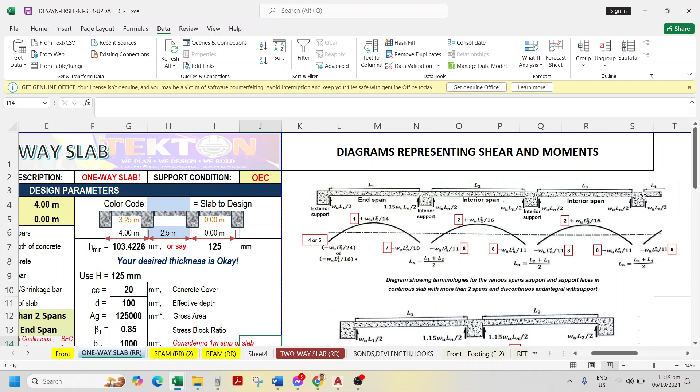Balikan natin yung design of one-way slab, fixing the issue of the average length ng span. Kung mapapansin natin dito, sa dalawang type of system ng slabs natin dito, meron tayong part ng interior span, may end span. Kung more than 2 spans yung ating system, may end span tsaka interior span. Tapos meron naman tayong case like two spans lang. So paano magiging independent yung ating design of one-way slab calculator?

So inayos ko siya na magiging fit para sa kanilang lahat. Itong parameters area natin is wala namang nabago, nadagdagan lang ng ganitong portion. Bakit? Kasi di ba kapag

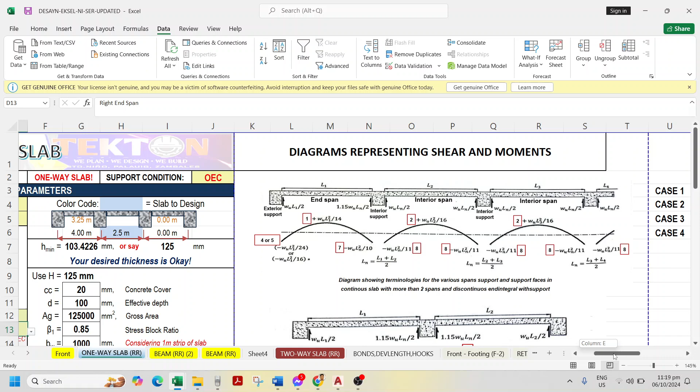nagde-design ka, for example, ng two spans, so you have L1 and L2. Ang deflection ng slab sa one-way slab, for example, you are designing this left span, is this deflection. Therefore, yung number 1 is WL1 squared over 14. Take note of this, L1 squared, meaning yung length mismo ng span 1 yung ginagamit. Hindi natin siya ina-average because it centralize the moment, nasa L1 siya, nasa center lang siya.

Unlike we have here negative moments in left and right support. Makikita mo dito na kapag sa left side o left support ng span 1, hindi din ina-average yung length, L1 ang ginagamit. So dito sa right support, mapapansin nyo na nag-LN or average of these two.

Okay, yung adjacent side niya. Mahalaga yung part na meron siyang adjacent span. Na-minimize nito yung resistance na isang slab kapag may katabi siya. Of course, dapat ma-consider natin yun. Kaya mapapansin nyo, lumiliit yung LN natin because na-average silang dalawa, or regardless of the length ng sarili niya, depende rin kung mahaba yung span ng katabi niya.

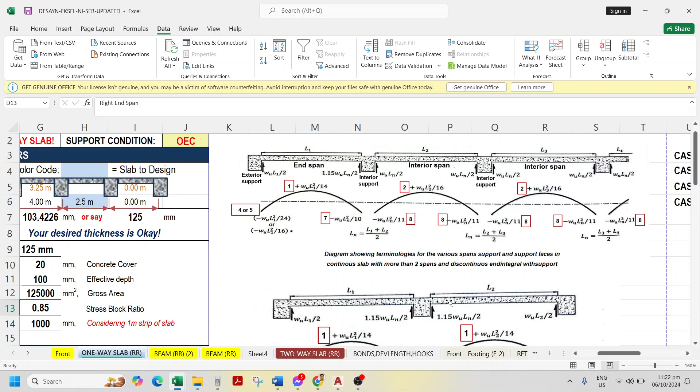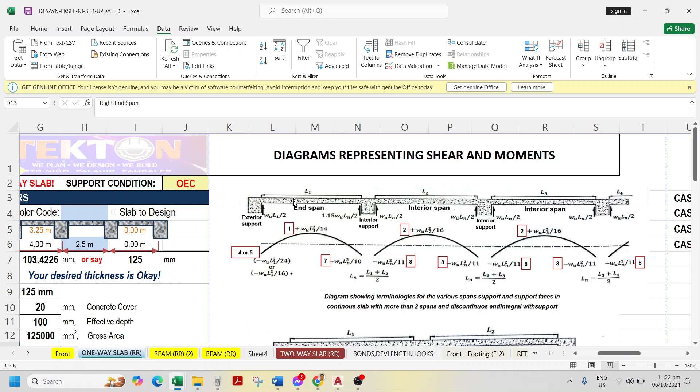So look at the more than 2 span system. Sa pag-end span ka, yung ating left support, specifically left end span sa left, hindi rin naman ina-average yan, maging yung kanyang positive moment. Pero pagdating mo dito sa support kung saan pinapagitnaan niya yung dalawang magkatabing span, na-average yung ating length. So yan yung issue na nire-resolve natin.

So gumawa ko ng isang case dito, using these tools, considering that this length input, and this diagram. So sabi ko dito, ganoon pa rin naman, may pili ka pa rin kung OEC, BEC, or C. So technically, mamaya na yan.

About the color code. Ano ibig sabihin ng color code? Yung color code dito na kapag ganito yung kulay, blue, ito yung slab to design or considering blue to design.

Ito po, so instead na gumawa ako ng panibagong calculator for two spans, minabuti ko na lang na, okay, ako as designer, ang lagi kong concentration is nasa gitna. So we have three portions kasi dito sa diagram ko, so nasa gitna yung aking design focus.

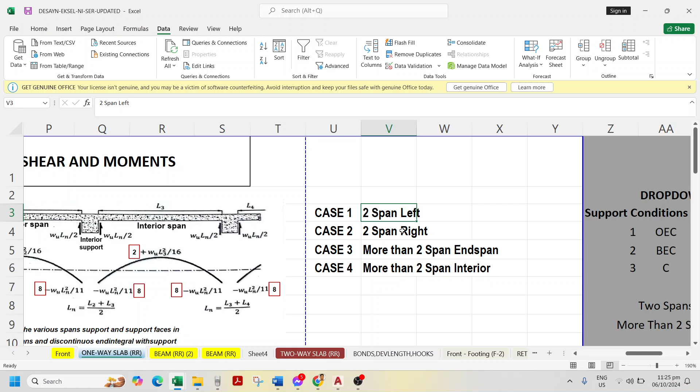So you need to specify like right ba siya o left. So magkaiba yun. And then case 3, more than 2 span siya, pero end span yung kanyang support. Okay, nasa end span yung location niya, pwedeng left or pwedeng right din ito. So lagay ko pala dito, left or right.

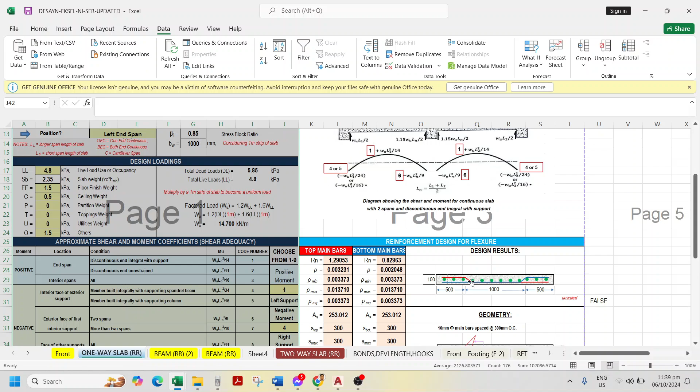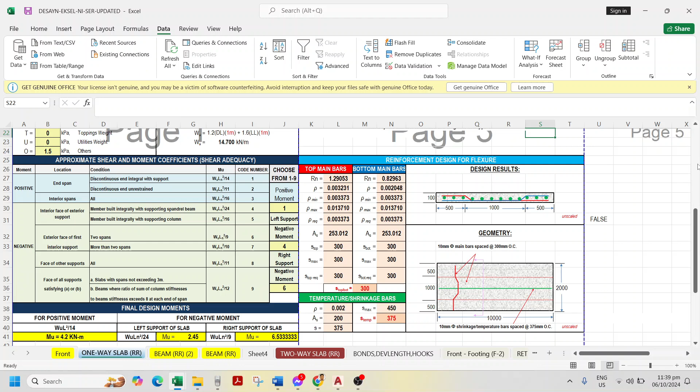Kasama itong picture, pati ito. Kasama kasi ito yung designing part. Yan yung para sa left side, two spans left side. Try ko to i-print para paggayahan reference.

Pag nag-design ka ngayon ng top main bars, ibig sabihin negative moment yung kinukuha natin. Kaya pansin mo, ang dinesign niya ay yung galing sa maximum negative moment. Ayan siya, pinagpilian tong dalawa.

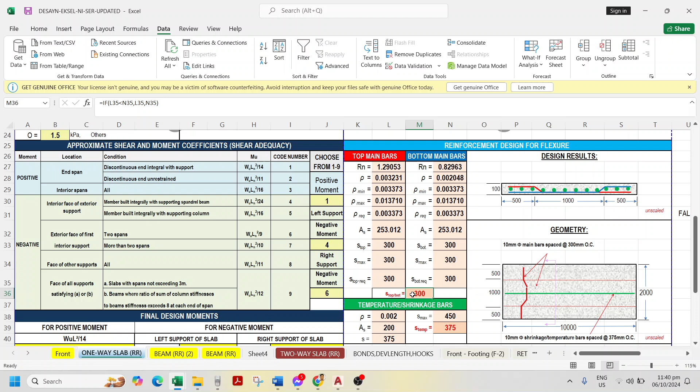Pero subukan mo mag 275 dito. Yan, lumiit yung spacing, pansin nyo. Kasi humina yung bakal mo, kailangan sinsinan yung spacing.

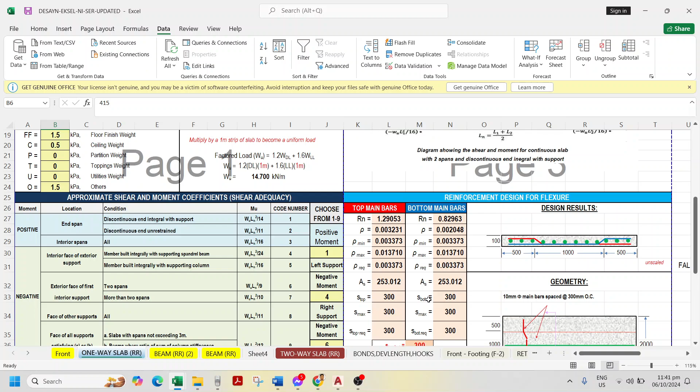Yung 415, ang laking tulong ng tinataasan mo yung strength ng bakal sa spacing. Kumukunti lang yung kailangan mong bakal kasi malalayo ang pagitan. Pero ang tanong, nakakasiguro ba kaya tayo na makakapwede tayo ng 415 na FY? Madalas nasa 270 or 275 yung ating 10 mm.

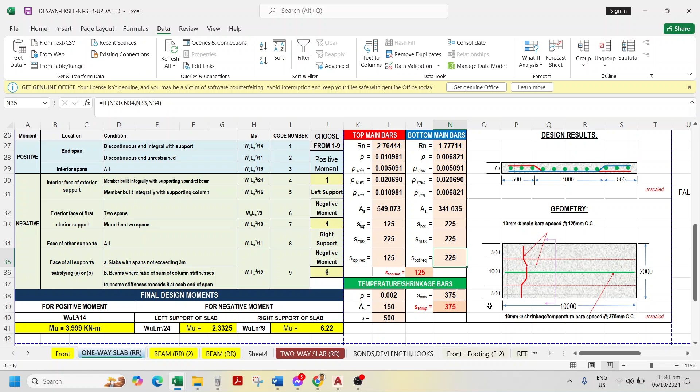Sige, at least yan na yung ating makikita. I want to print this one, pwede nyo nang gayain yan. So page number 1, tsaka page number 3 yung ating i-print.

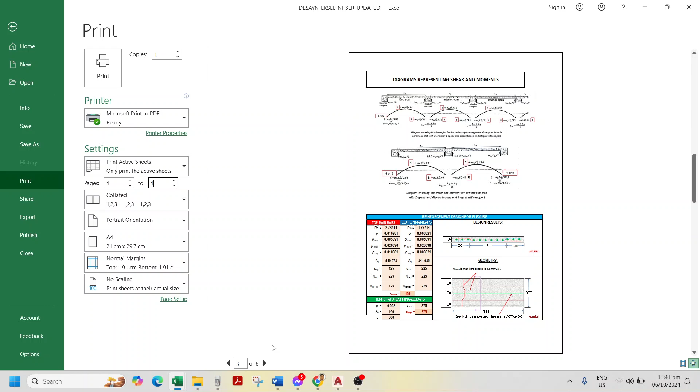Huwag nyo na lang siguro pansinin yung page number 2. I-print ko na po din yan, hanggang page number 3. This is for case 1, one-way slab, case 1. One-way case 1, PDF.

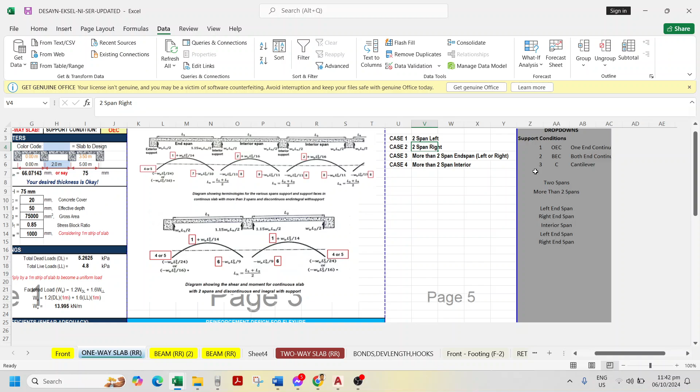Okay, so let's proceed with case 2. Case 2 is 2 span naman siya, pero right. Paano naman natin siya ililipat sa kanan? Hindi ko babaguhin yung diagram ko at hindi ko rin babaguhin yung posisyon ng dinedesign ko. Ito lagi yung ating dinedesign, ililipat ko lang yung katabi niya. For example, ang gusto ko nang i-design, ito yung drawing.

2 and 5, tapos na ako sa 2, ang i-design ko naman is 5. Ilalagay ko ngayon dito si 5. Tapos yung 2 sa napunta sa left side. So ito ngayon yung 2, kuha natin. Of course, wala na siyang katabi sa kabila.

Ayan na yung ngayon, naging right side na yung ating dinidesign. Again, the focus is the blue one. Ngayon, papalitan mo rin yung ating commands, nasa right end span ka na. Yung posisyon dinidesign mo nasa right end span, 2 spans pa rin, wala akong binago sa kanyang mga parameters. Of course, yung HMIN ang nagbago.

Anong tawag dito? Nagbago yung length mo dito kasi dinidesign mo 5. Tapos one end continuous po tayo. Yan, save ko na.

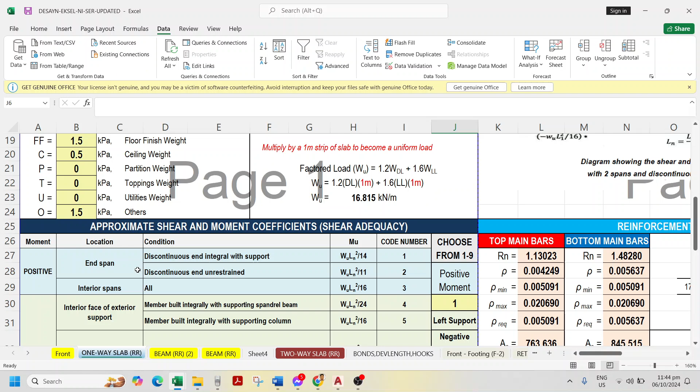Ngayon, punta tayo sa averaging ng length. Pansinin natin, ang dinidesign mo sa kanan is, again, positive moment muna niya is, of course, ganun pa rin. End span, 1, tapos first interior support pa rin siya. Exterior support siya, okay wait lang.

Magbabago pala yung negative moment mo sa left side. Ito yung left side mo eh. So pagdating dyan, this is the first interior support, exterior face. Yung negative naman niya yun, sa left side, ang number 6.

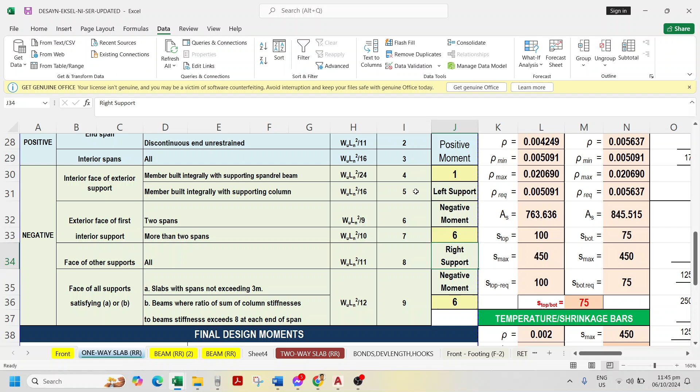Okay? And then sa right support negative moment, right support negative moment is end span, so 4. Or should I say interior face of exterior support, which is number 4. So baliktad naman siya ngayon. Kaya pansinin nyo ngayon yung ating mga moment.

Ngayon, magtatalo na naman tayo sa average length. Tingnan nyo mabuti. Kapag right support or right negative moment ang tinitingnan mo, ano ang span na ini-expect mo dun sa WL squared over 24? Correct, dapat yung 5, kasi walang katabi to.

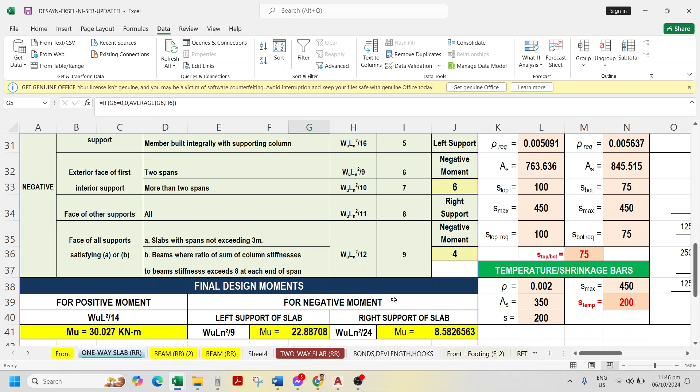0 siya, at saka pansin nyo, nagbago din siya. Nung nag-0 ako dito, automatic 0, wala siyang in-average. Pero ito, nagkaroon siya. So next, doon sa right support of the slab, 5 yung ating length. And then, the left side is yung average length, 3.5. Same concept, at ganun din yung nangyari.

And we have the answer. Yung ating spacing pala ay divisible by 25. Kaya ganyan. Print ko na ulit - 1, 2, 3. So this is case 2.

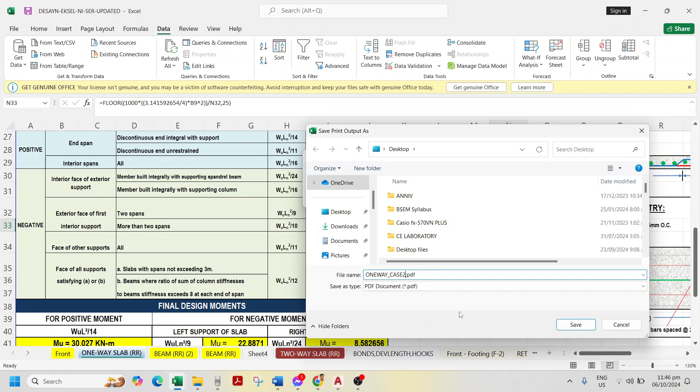Okay, so the next case is we need to do more than 2 spans. We're done with 2 spans, right? That's only 2. So now, more than 2 spans.

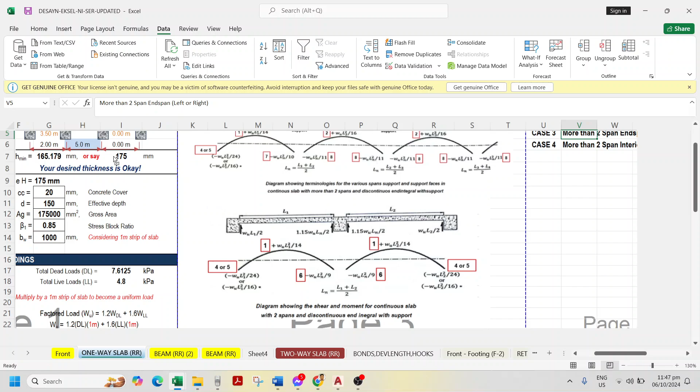Let's prioritize the position that's in the end span. Actually, if the position is in the end span, it will also act like a 2-span case. It's just that there happen to be many interior spans. But what if what we're designing is the end span slab with more than 2 spans? It will act as the left side of a 2-span.

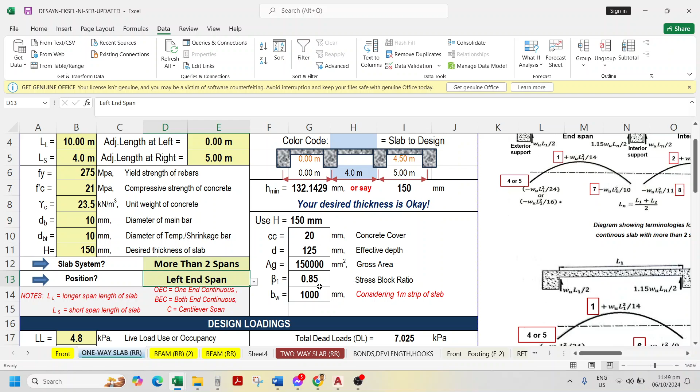Again, you have three choices when it's more than 2 spans. So, left end span. Actually, that's it, okay?

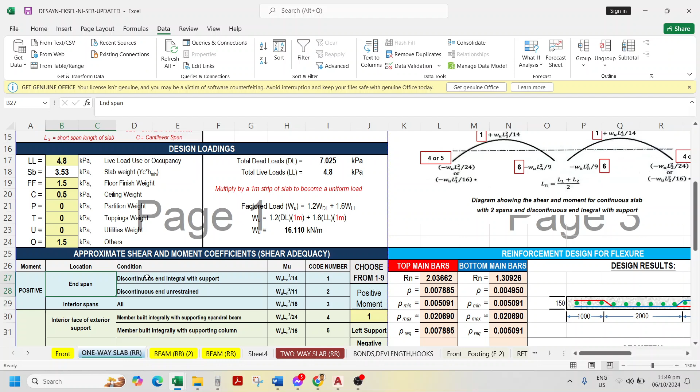Positive moment, again it's an end span. So it's like 2 spans, right, being in the end span. So when it comes to negative moment on the left, of course it's the exterior face.

It's the interior face of the exterior support. So that is 4 again. And this is 6.

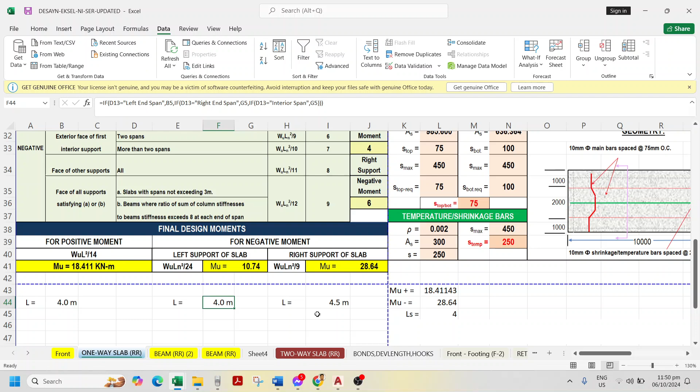Now when it comes to length, of course, this is its design. On the left side, it's its own length. On the right side moment, it's the average. There it is, that's programmed in.

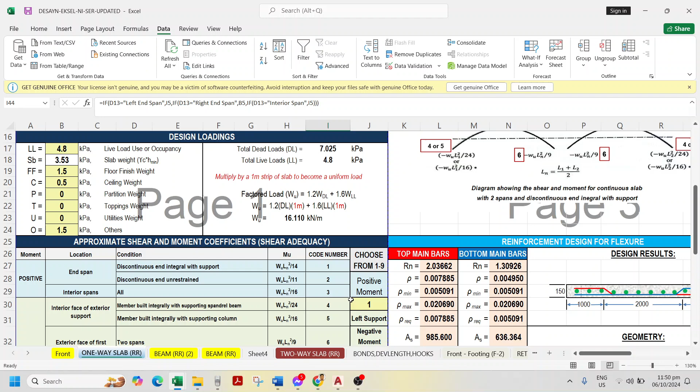And that's it for the more than 2 spans, left end span. Let me print this again. This is more, or one-way case 3.

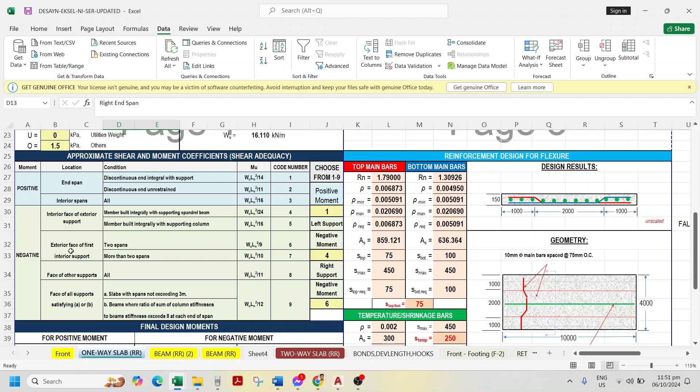Except, since you're on the right now, you're at the right end. Your negative moment will change. Coming to the left side, here you are. So that is an interior support now. Interior support, exterior face of the first interior support, that is more than 2 spans, case 7.

More than 2 spans, 7. There, it's not WL squared over 9 anymore, but 10. Then coming to the right, that is interior face of the first exterior support. So that is 4. There, average. So here it is.

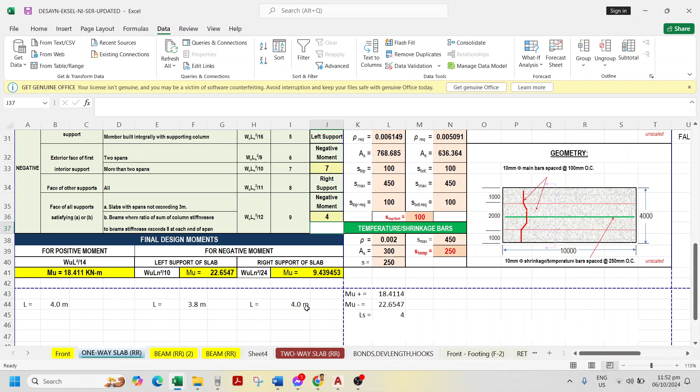Okay, this is 3.75, this is 3.75. Then this is the 4, its own, and then the average, left and right. Okay, pay attention to that.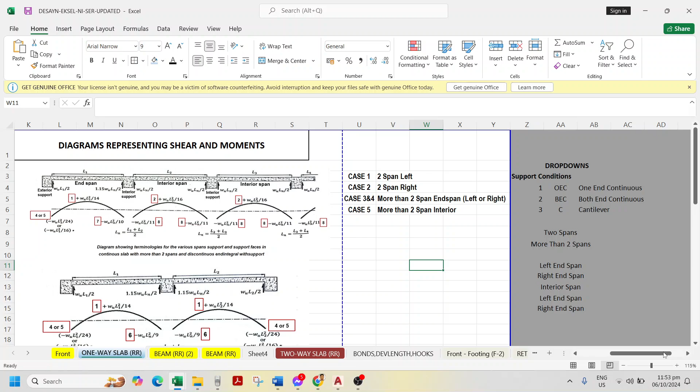And we are down to the last, okay, so case 5. Case 5, case 3 or 4. And by the way, 3 and 4. So it seems I missed one here.

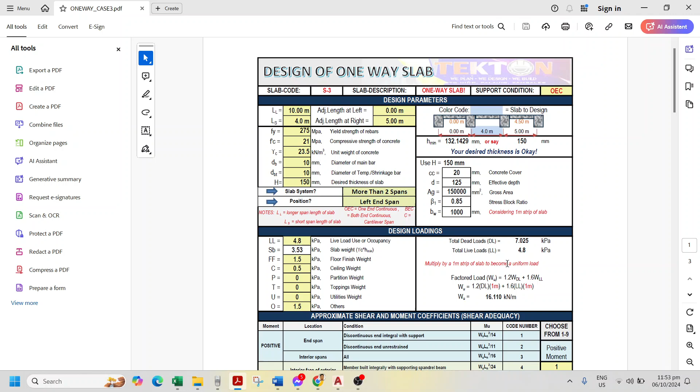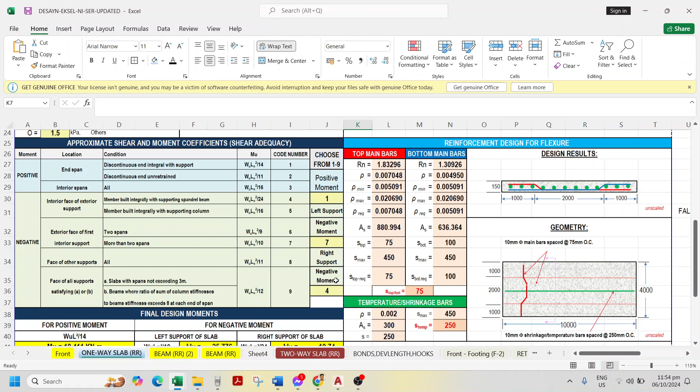So this should be WL squared over 10. Let me repeat that. Left side or left hand, so this is 5, 0. This is 7, this is 4. So, print.

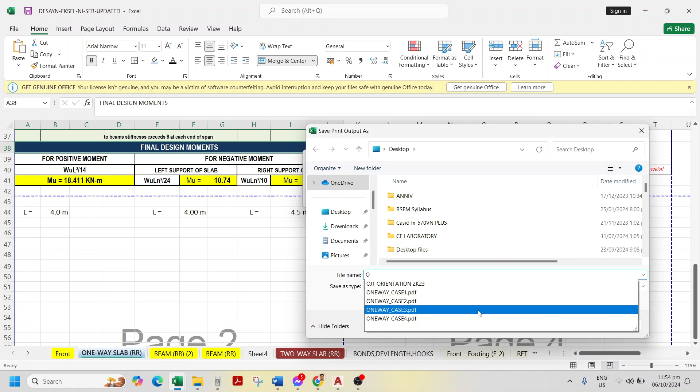Okay, so we're down to the last sample, case number 5, interior span - more than 2 spans. This is the interior span. Since it's an interior span, it already has two neighbors, so parehas na siyang may katabi. This is now the both end continuous.

Imposibleng mag-interior yan kung wala kang katabi, di ba? So sa gitna siya. For example, ang katabi mo ay 2 meters sa left, 4 din katabi mo sa right, o sabihin natin 3 meters ka lang sa gitna. So interior ka. H minimum, susundan niya yung length na nandito - sa 3 meters, tapos both end continuous. So yan pa rin yung parameters, interior span.

So ngayon, ang concentration mo ito. Kung ito ang left side negative mo, moment, ano ang susundan mo? Yung length ng sarili niya o yung average sa left? Correct, yung average sa left. Kaya expect mo sa left side, yung average sa length, sa left, yung kanyang ginamit. While dun sa positive moment, ang ginamit niya is 3, yung sarili niya.

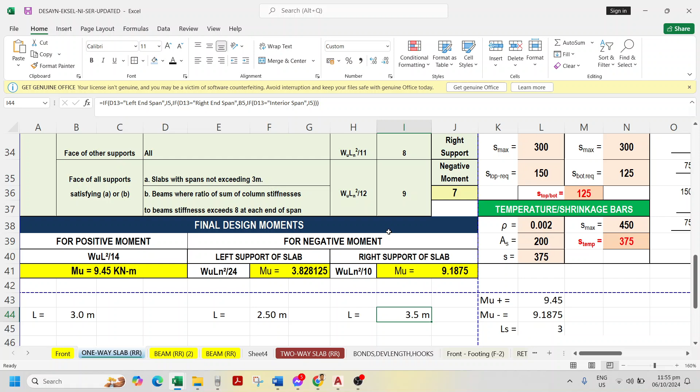Pansinin niyo, sa right, ang ginamit niyang length ay yung average nung nasa right - yung 3.5. So yun lang.

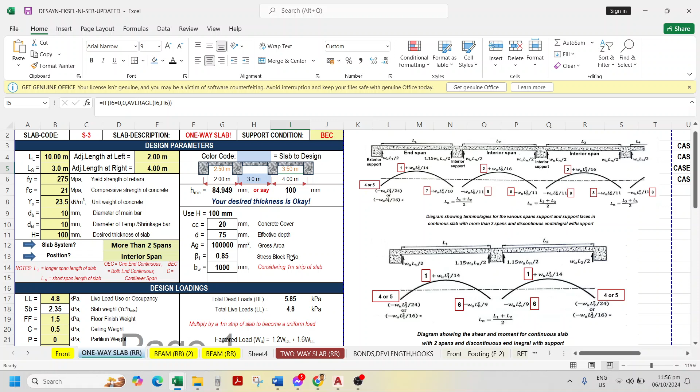Okay, so pagdating naman dito, dahil nasa interior span ka, for example, ito ka, ang dinidesign mo yung first interior span. Ngayon, magbabago na lang yun dito sa positioning ng ano mo. Kung first interior support ka na nagde-design, ano yan? Left side, yung left negative mo is what? So first thing, positive muna pala - interior spans yun, all, so WL squared over 16 lang yun, which is 3. Wala namang pinag-iba yan.

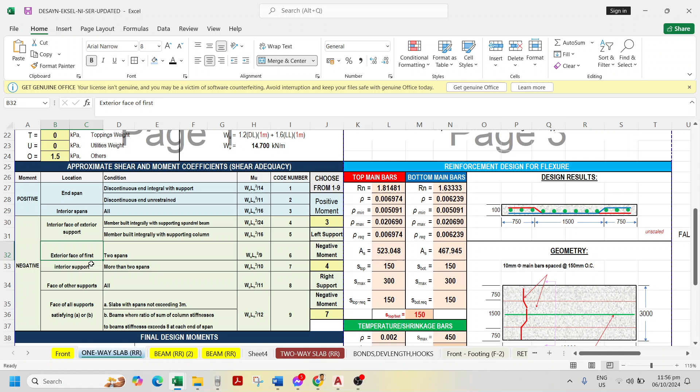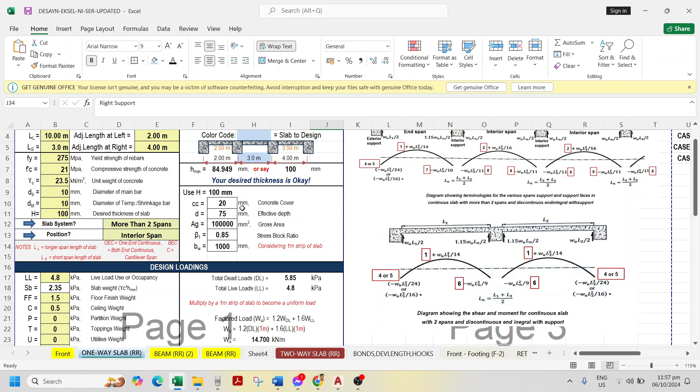And then negative - left side, o left support negative, first interior span. So we have the first interior support, exterior face. Okay, exterior face of the first interior support. More than 2 spans, so this is 7. Correct, so this is first interior support, exterior face. Now, this is the interior face of the first interior support. So, exterior face of the first interior support.

And then, sa kanang moment, okay, is face of other support - yan, face of other support, which is 8. Okay, yan po, and design. So nga pala, nagbabago itong mga ito, depende sa lalabas na sagot. So print natin, this is for case 5.

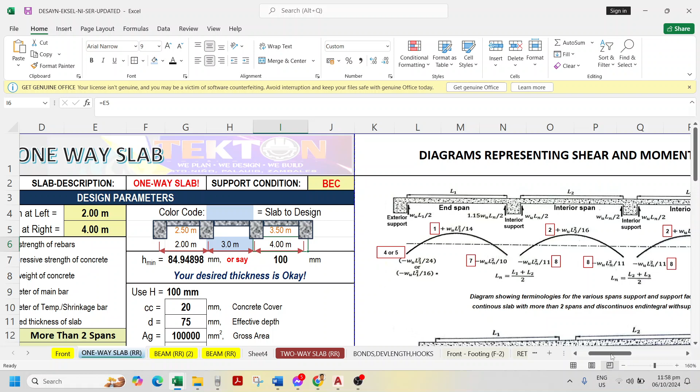Okay, so paano naman kung sa pangalawang interior span, yung one-way slab? Edi puro ano na to, face of other support na siya - yun lang naman na magbabago. For example, itong sumunod na span, which is yung katabing kapitbahay, ito po, kaya yung 4 meters naman ang i-design mo. So may katabi ba yung 4 meters? For example, 5 meters, so babaguhin mo lang yun - i-transfer mo siya dito sa blue. So 4, diba? Ang daming katabi niya sa left.

Ang katabi niya sa left, 3. So katabi niya dito sa right, 5. Kama na, o di ito na siya - nalipat mo na siya. Pero this time, interior span ka na sa pangalawa.

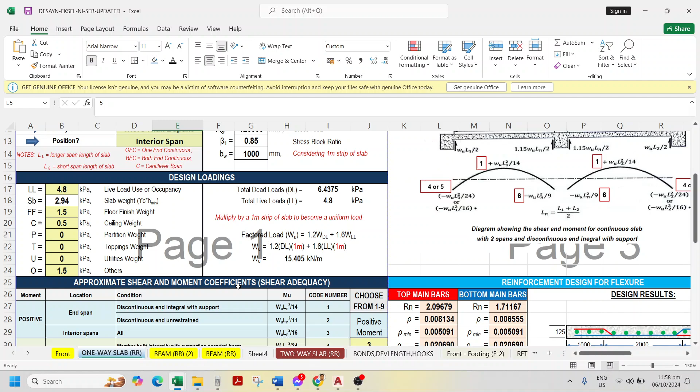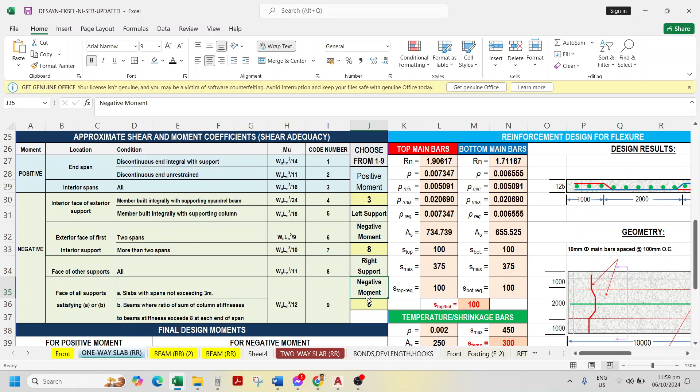So ngayon, ang magbabago na lang is ito. Yung positive moment mo, of course, ganun pa rin, 3. Yung left side negative mo, okay, of course, face of other support na, so parehas na sila, 8. Yeah, kasi more than 2 spans yan, and more than 3 spans ka pa nga eh. So parehas lang na 8 yung ating moments. Ang concept nun kasi nasa gitna ka na, gitnang-gitna ka ng gitna, so may factor yon sa ano mo, may resistance yun sa mga adjacent slabs niya.

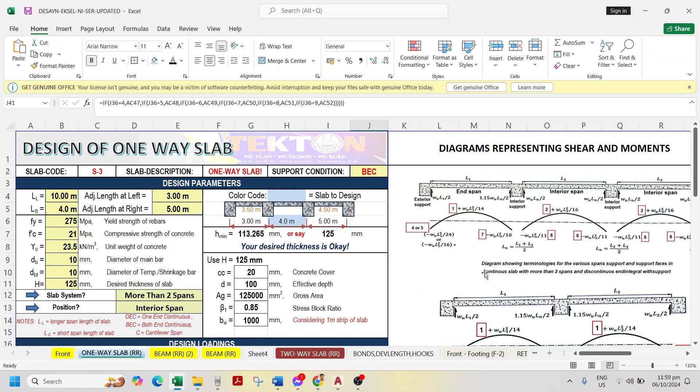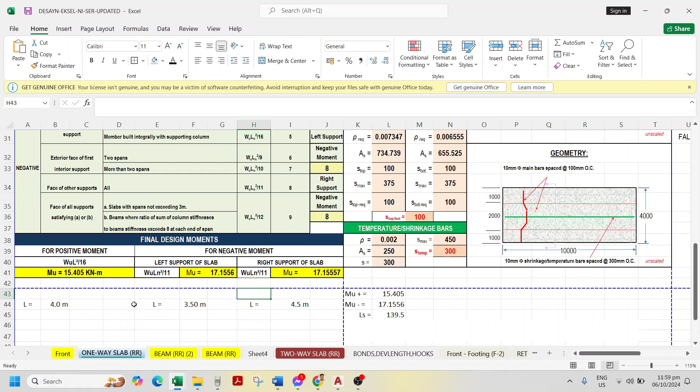So yan, finally we have our final one-way slab variation 3.0. Develop na ito, may average ka na length, at the same time, positioning of our spot. Wala akong dinagdag na drawing, binabago ko lang yung kanyang position sa katabi niya. So appreciate this and try to remodel. At the same time, if you have your own style, do it. But again, hassleness, i-avoid natin yun.